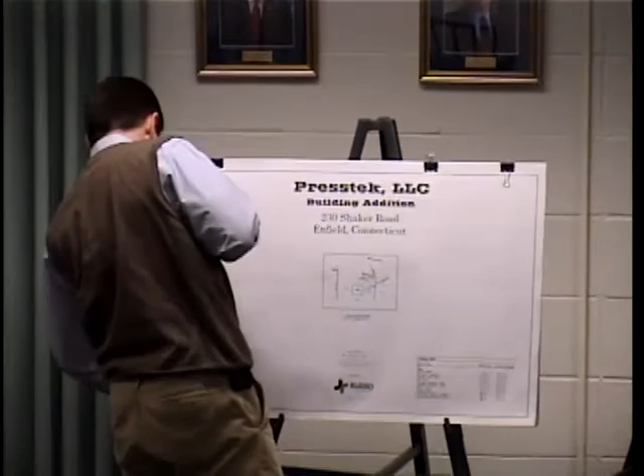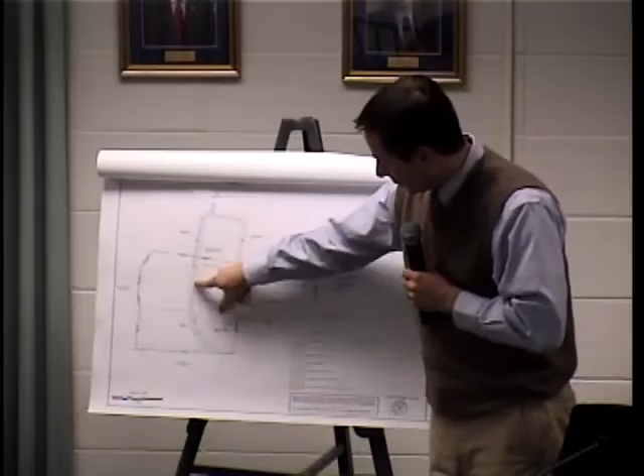As I mentioned, this is a 25-acre parcel. You see it's a rear parcel with a long driveway that is accessed off of Shaker Road. This is the building location on the lot, in the middle of the larger portion of the lot. Look primarily at sheet 3, and then we'll go into more details. This is the overall site plan, and I've highlighted with color here some of the key features I want to draw to your attention.

First of all, the existing building is shown here with the striped hatching, and the proposed addition is this gray shaded long portion, which is on the north side of the building. In this case, north is facing to the right rather than up.

The building is located in an existing lawn area between the access drive, which comes in off of Shaker Road and goes around the north side of the building to the main parking lot to the east. There's also a fire lane that accesses the west and south end of the building.

The blue line you see here is the actual wetland line delineated in the field by our soil scientist. The green line is the wetland line as shown on your town wetland map. As you can see, it goes right through the building.

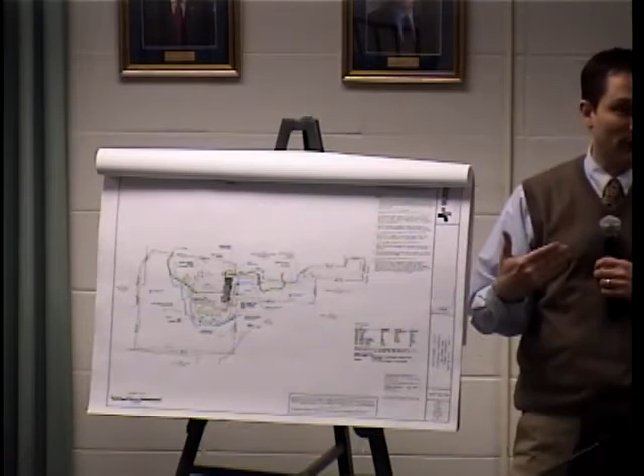There's less wetlands on the site than the wetlands map indicates, but there are wetlands, and so there are regulated activities associated with this application. Particularly, the wetlands in view are associated with a stormwater basin.

That stormwater basin is located on the east side of the driveway. As you come into the site off this driveway, on the left-hand side is a stormwater basin, and that stormwater basin is considered a wetland. So that blue line represents the wetlands in closest proximity to our proposed activities.

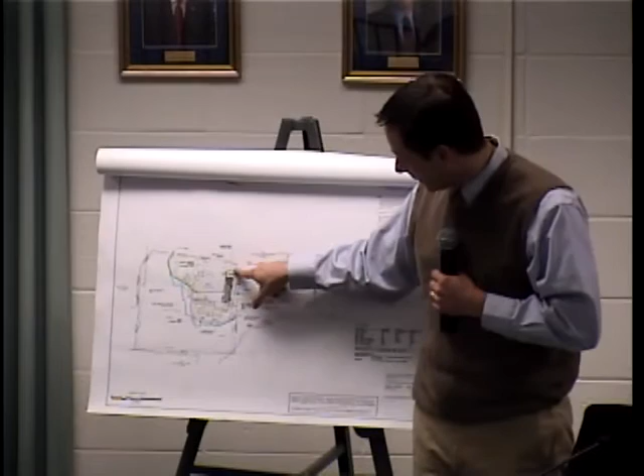The yellow line on the plan is your 100-foot regulated area. So everything within that yellow line falls within the jurisdiction of this review, which includes about half of the building, as well as the drainage improvements and utility work proposed on the north side of the addition.

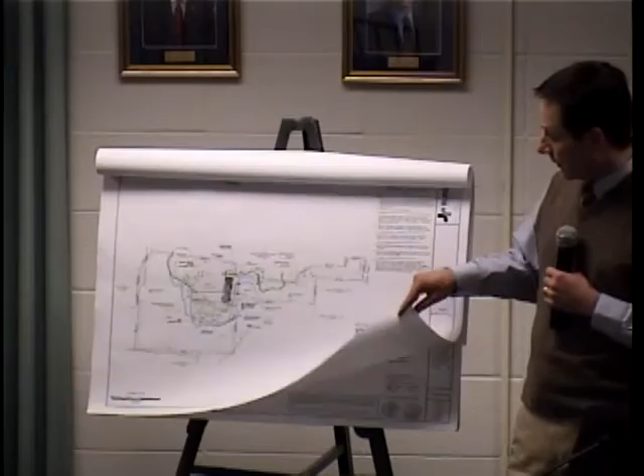So I'd like to move on to the more detailed plan. This is at 1 inch equals 20 feet and shows what is being proposed here. We have a building addition with a narrow connection to the existing building within the existing lawn area in front of the building.

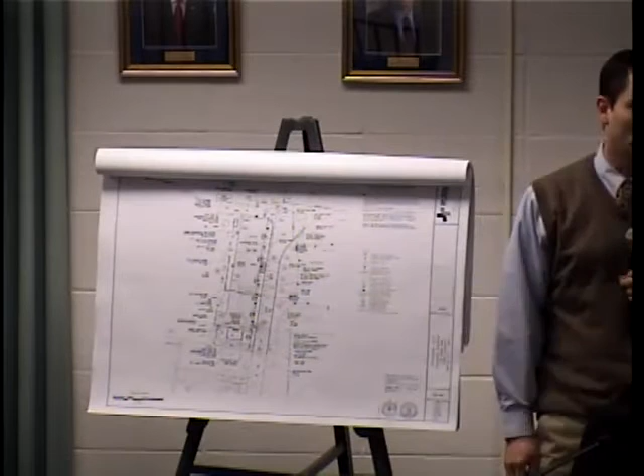Associated with this building are some utilities and mechanical equipment. One is on the east end of the building. This large concrete pad is what they call an RTO. It takes exhaust and burns it so it's clean before it leaves the building, involving a stack to discharge that at an appropriate height, and that stack and its emissions are regulated by the EPA.

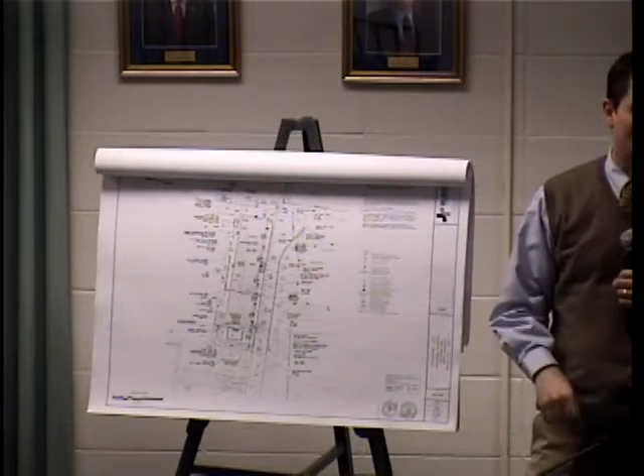But this is going to be a concrete pad, visible from the outside of the building, approximately 111 feet from the property line, which is about the same distance to the wetlands—a little over 100 feet away. So it's not actually in the regulated area, but not too far from it.

The other activities outside the building are on the back side. The plans you have show this concrete pad in the back, which is for a nitrogen tank—a vertical tank above grade that holds nitrogen for the processes done inside the building. We've added a couple other items: a generator right next to it, and possibly an underground tank for fire suppression.

Because we're not sure yet what the fire department and the water company will be able to provide in terms of volume for the sprinkler system, that underground tank is there as a contingency if it's needed to provide that extra volume for the fire system.

Excuse me, that's not on here? No, that's what I said. So the things we've added are the tank and the generator.

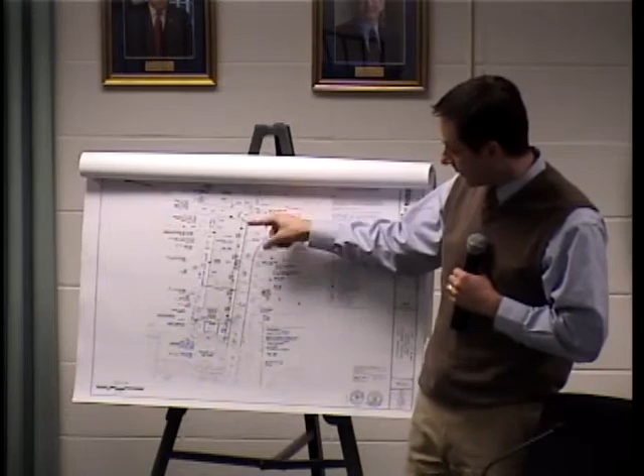This plan has just recently been submitted to planning and zoning, so we have an application coming up before them. One other change: you'll notice on your plans there's a corner of the building, the northwest corner, where there was a notch in it. The reason for that notch had to do with some building code hurdles the applicant had to decide how to address.

That was one way to address it, by maintaining a certain distance from the property line at this little corner. Well, they found another solution that didn't require that unorthodox jog in the building. They were able to eliminate the jog by increasing the distance between the existing building and the addition by another 4.5 feet—it was 16 feet, now it's 20 and a half feet, a 4.5 foot change.

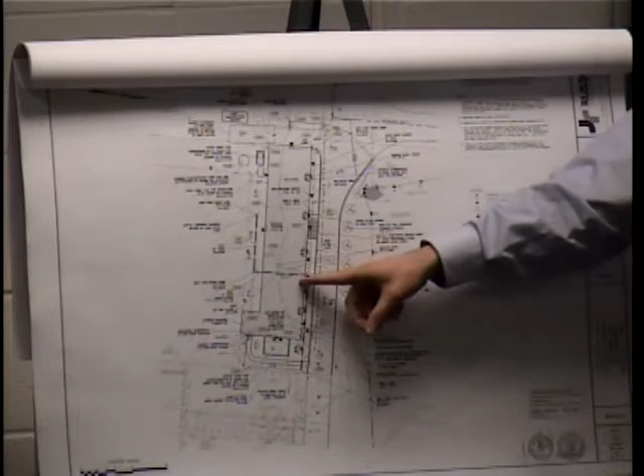What moving that building has done is put our storm drainage, which we're putting in to pick up the roof leaders and runoff from the roof and some of the lawn areas, into conflict with an existing gas main in that area. So we're relocating the gas main.

Also, because of the grading of the building and the need for an overhead door on the west end of the building, we've regraded the pavement around here. So all of this pavement, shown by the dot shading, up to this limit and around this side of the drive, is going to be replaced—that's disturbance within your regulated area again. But we're not changing the driveway location.

We're not moving the driveway any closer to the wetlands. We're leaving it right where it is. We're just raising it up a little bit higher so that it works with the doors of the building. Originally, we were going to have steps coming down from there or not have direct access, but that was...

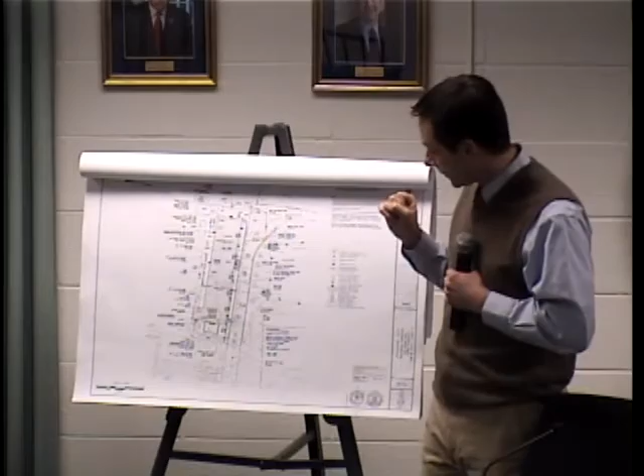This next page is our erosion control plan, which depicts the erosion control measures for this site. Essentially, because this is a grass area, they're going to have to strip the topsoil from this area. We're going to stockpile it up here with silt fence around it to protect it, and then any excess will be removed because they're not going to need as much when they are done.

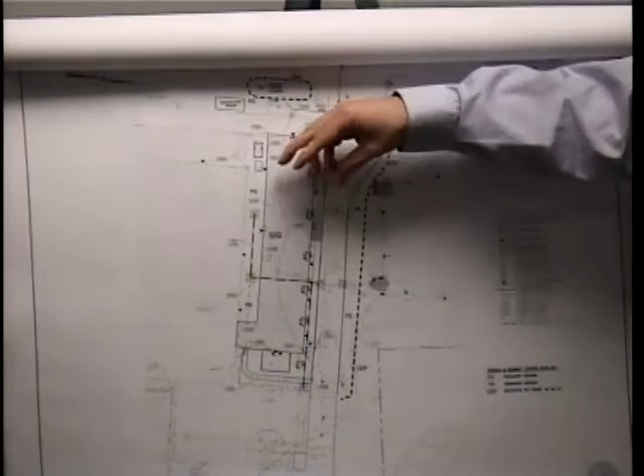And then all of the catch basins in the area - the other key area where there's potential for impacting the wetlands during construction, obviously from sediment, dirty water getting into the wetland system and into the storm drainage. So silt sacks will be installed in each of those catch basins, and they've been noted on the plan that they'll be protected with the silt sacks, which have to be cleaned and maintained during the construction process.

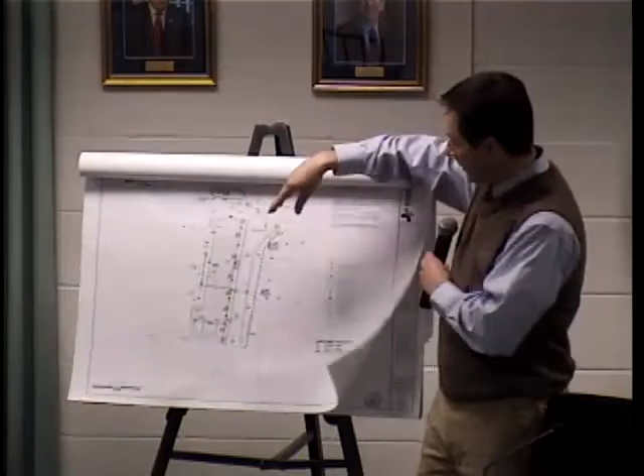In addition, I'll just mention briefly that the plan you had did not show a silt fence along this side of the road because we weren't touching the road initially, but now that we are, we need a silt fence there, and so we do show the silt fence there.

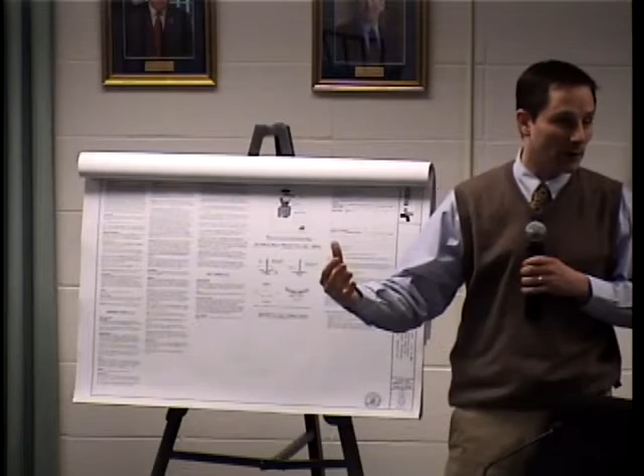And then, just briefly, in addition to the erosion control plan, we have our erosion control notes and details that include a construction narrative and sequence, which is here below the checklist, as well as a post-construction maintenance schedule, which provides direction to the property owner to maintain the storm drainage system so that it continues to function properly, so that we don't have long-term impacts down the road to these wetlands.

So that's the summary. I don't know if we need to go into the details of the building itself or anything related to that. I did bring those plans if you'd like to discuss them.

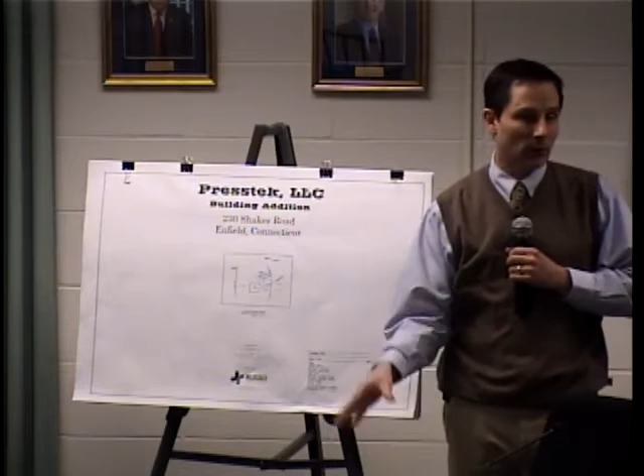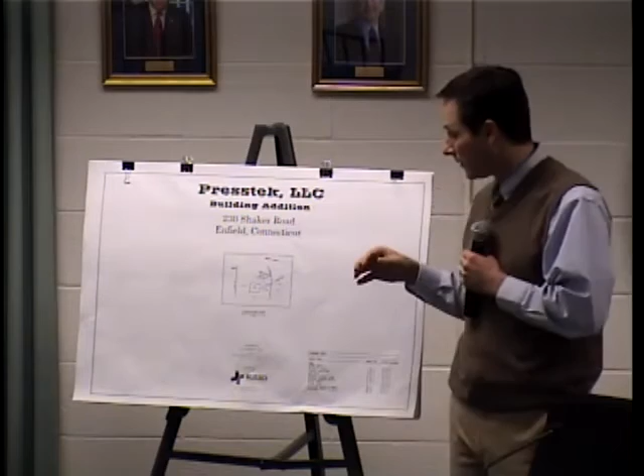In our ART with staff, they had suggested that we submit an environmental report regarding the property, which was submitted with the application. It's something that was required as part of the transfer of this property. Presstek bought this property from Anacoil. You may recall Anacoil was the previous name. I think there's still the sign out front that says Anacoil, right?

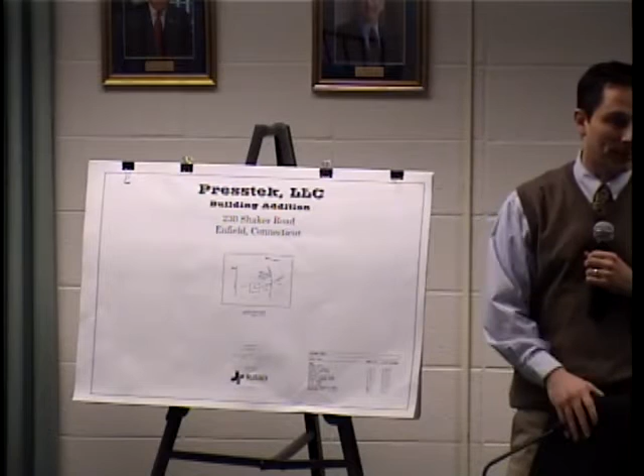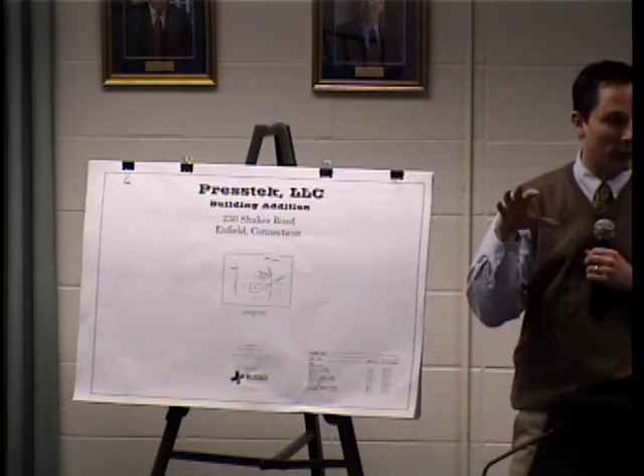So the report was provided as a courtesy to demonstrate that there are no existing environmental issues associated with this property. This is an industrial use and an industrial activity, and the representatives from Presstek can give you a lot more detailed explanation about what they exactly do. But essentially, they're coating plating for printing plates, lithograph printing plates, and that process involves chemicals and materials that are hazardous and are contained within the building.

So one thing that's important to note, and which we did in our narrative, is explain that all of these hazardous materials occur within the confines of the building. And if you go back to the overall site plan, for example, we were asked to note specifically where those hazardous materials are stored in the existing building.

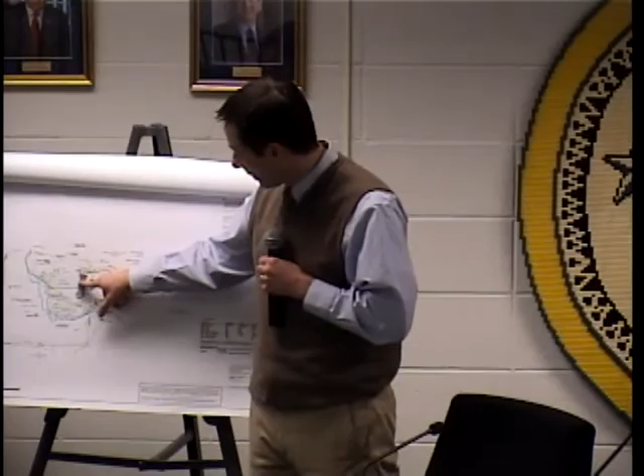So that's designated here on the plan. It's in the back, that would be the southwest corner of the building. That's an enclosed structure, so it's not open to the elements. It's a contained area. Then the new addition is broken up into two parts, and the chemicals are located in this portion here, which is the crisscross hatching portion of this building.

So we just wanted you to understand and see where those activities were taking place, but assure you that they're intended to remain completely inside the building. There's no floor drains in the building where if it leaked, it could get out and get into the wetlands. And so we don't see this as having any impact on the wetlands.

But maybe Scott, you would like to talk about how you identified these wetlands and your findings.

We on? Not sure if I'm on. Am I on? Okay. Good evening. For the record, I'm Scott Stevens.

I'm a registered professional soil scientist with Soil Science and Environmental Services Incorporated out of Rocky Hill, Connecticut. I've been with the firm since 1987. Like all of you, I also volunteer my time, and I'm a wetlands commissioner, on the Wetlands Commission with the town of Rocky Hill for the last 5 years or so.

On January 25th of this year, 2017, I inspected the site at 230 Shaker Road in Enfield. We delineated the wetlands and the water courses on the property, dug numerous holes all throughout the whole site to basically classify the soils and delineate the wetlands on the property. There's basically 4 different wetland areas that I delineated with 76 flags.

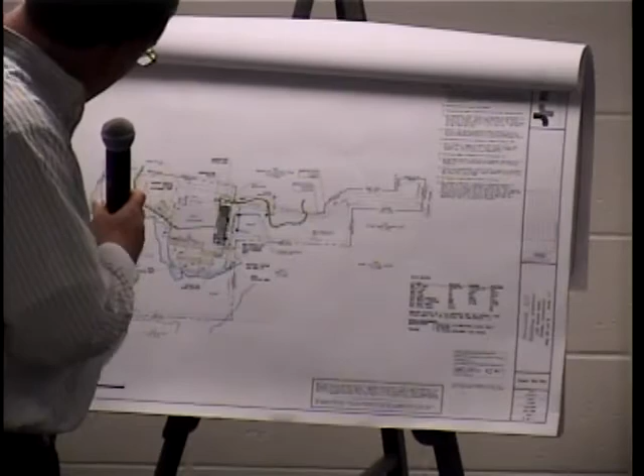Maybe you could go over to the map and just explain where that pond and the water course are. That might be of interest to them. I believe they're pretty remote from the area that we're working in. Again, the property would go this way, that's to the north. So the ponded area is way down here within the middle of the wetland.

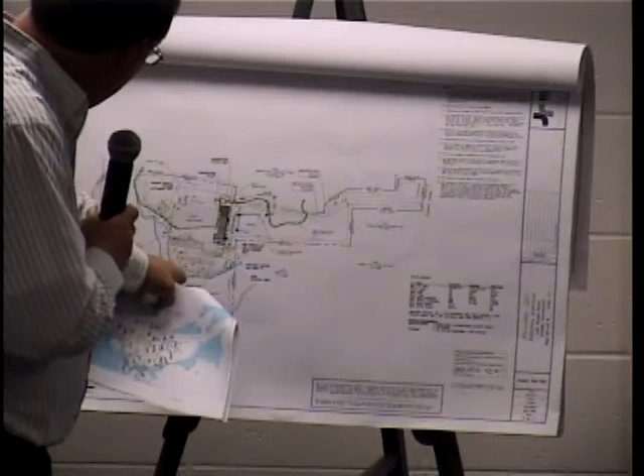And then the water course, you can't really quite see that railroad track, but oh, here it is. So where that railroad track is, the perennial water course kind of comes down through this way, goes into a culvert pipe, and then it keeps flowing that way as far as I could tell. And there's the detention basin there with the wetlands that are closest to it.

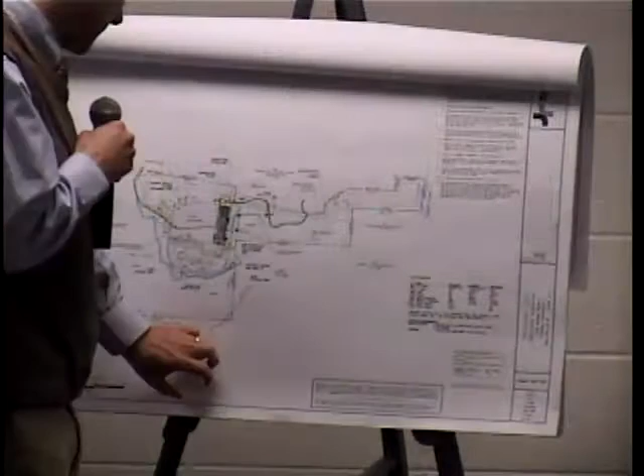Where does that detention basin discharge to? So there's an outlet pipe in this corner of the basin, and we're actually not changing any of the pipes going into or out of this basin. All of our work is occurring in the existing developed areas. But there's a pipe coming in here, there's a pipe coming in here, there's a pipe coming in here, and then right next to that one here is one going out that appears to go in this direction, and it must discharge somewhere down here.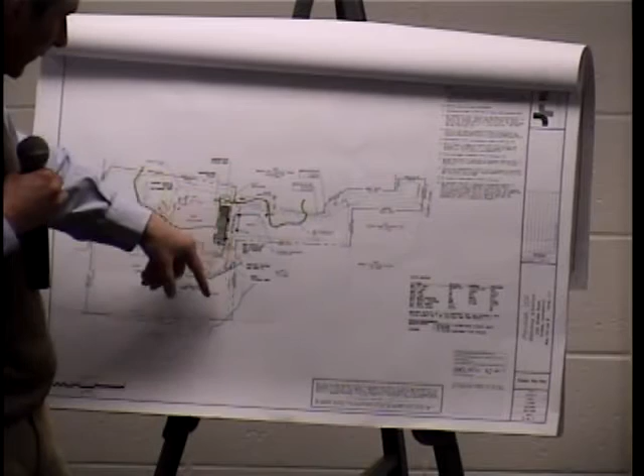So you didn't locate the actual outfall? No, the actual outfall was not readily identifiable. But it does go down to that. Yeah, it heads in the eastern direction. That way.

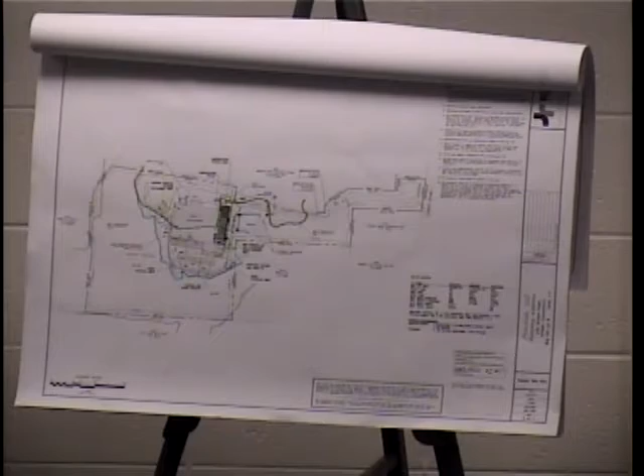One thing we did note is, I think Carrie Ann noted it this afternoon, the ECAF wasn't in our packet. The environmental condition assessment form you're speaking of? Yeah. We did submit that with our application, so I'm not sure why it wasn't included in your packets. It is in the file. You would like to see it? Yes.

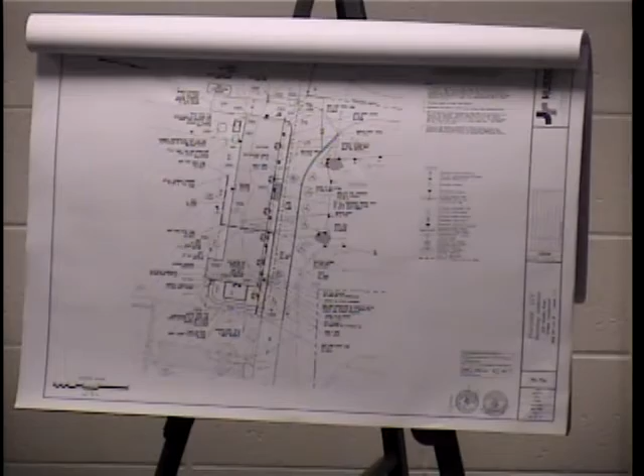This is the nitrogen tank pad, and to the west, to the east is the generator, and to the south is the fire suppression.

The only underground is water, clean water, yeah.

So Dan, I'm sure we're going to get new plans, updated. We would like to, if you could, approve with condition, and then we will submit the final plans that include all that I've presented tonight. Correct, and any other conditions that you place on it.

Yep, sure. And then make sure he signs it. It says here that Scott didn't sign the plan, so.

I believe so, yeah, there's a typo in the letter. Because they're signed, there's a signature right here on the copy. It's just the typo in the letter. Did it have that on another application? So it possibly is on the site plan, sorry, Steve. Oh, okay.

Now, with the change of the wetlands location, refresh my memory, I missed the last meeting. You guys haven't been before us to actually request that, correct? So is that part of this application, to move the wetlands, or is it just that you're looking for the permit to be within the regulated wetlands?

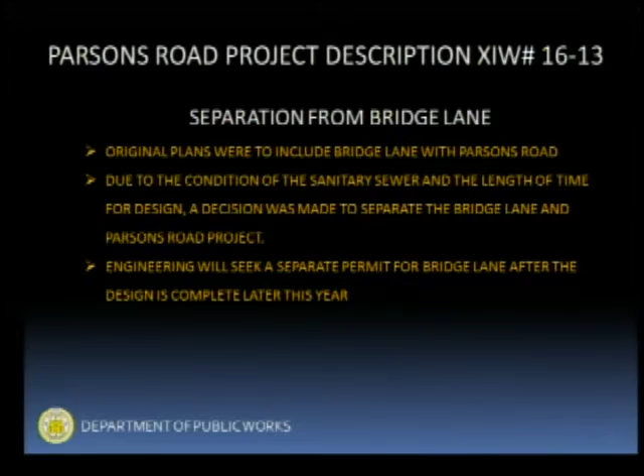It's a very complicated project. We have a very large culvert over there towards the westerly side, and we have a lot of things that we're doing out there, so we're going to be back to do that. So in an effort to move forward, Parsons Road has been split, and we're going to move forward.

So this project consists of about 1.2 miles of complete roadway reconstruction with some very minor vertical and horizontal alignments to it. There's going to be new curbing. There's improved and new storm drainage systems, which the big take-home point is going to be a very large, significant improvement to the water quality.

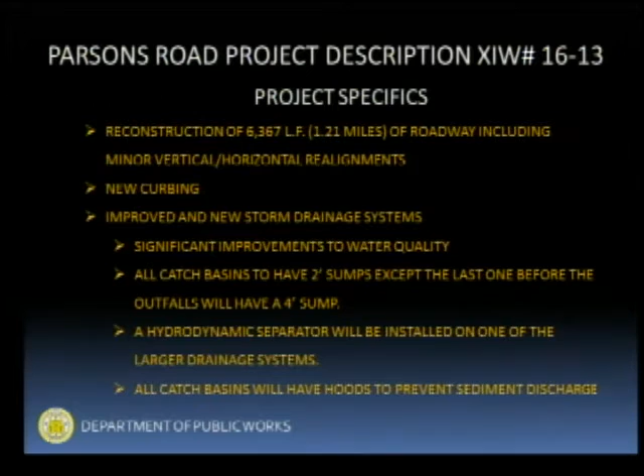All the catch basins are going to have 2-foot sumps now, except for the last one before the outfalls, which are going to have a 4-foot sump to help trap sediment. A hydrodynamic separator is going to be installed on one of the larger drainage systems, which is on the western or the southwesterly portion next to the train tracks on the southerly side, before that goes out to the large 36-inch outfall. All catch basins are going to have hoods or traps, however you want to call it, to prevent sediment discharge.

We are installing 9 new catch basins, and we're going to replace the rest of the 16 of them in their entirety. We're not just going to rebuild them, we're going to replace them with newer structures. We're going to add 3 drain manholes as well.

The 4 outfalls are going to discharge to riprap splash pads, which again helps reduce erosion, slows the stormwater that can come off it, and also helps to trap some sediment before it's discharged to the river. We're going to do our standard turf establishment in all the grading areas, and again, the biggest thing here is the water quality improvement.

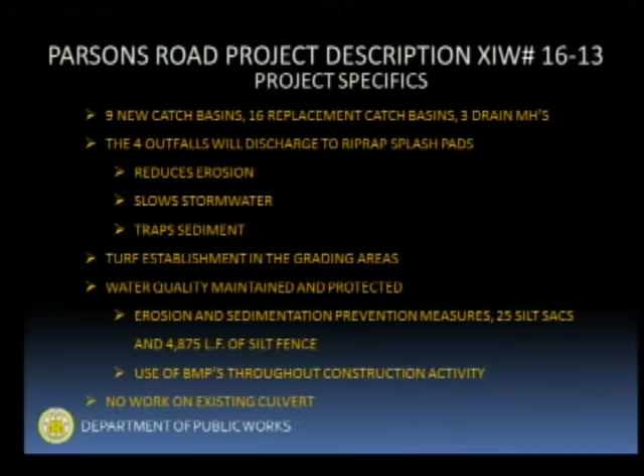We're going to install 25 silt sacs during construction, and we're planning on using 4,875 linear feet of silt fence along the roadways. We're also going to use our best management practices throughout our construction activity, and one of the biggest things is there's no work on that existing culvert, that 10-foot structure next to the boat ramp on the southerly side. We're not going to do anything there except for replace the catch basin that's in poor shape there.

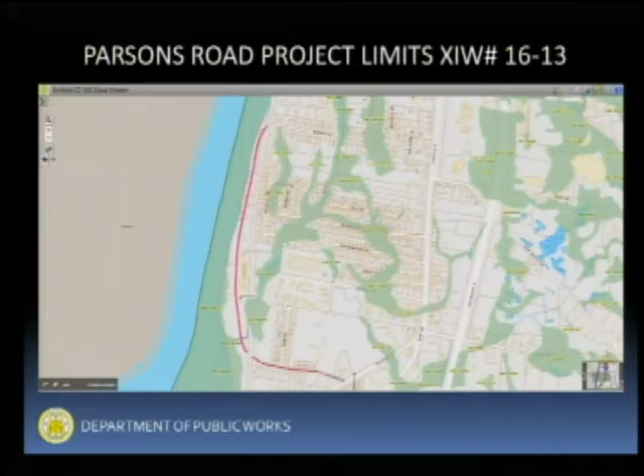For those who don't know where Parsons Road or Bridge Lane is, this is Route 5, Enfield Street, which splits into King Street here. This is Old King. Our project starts on the southerly part, Parsons Road, and goes westerly to the first train tracks. The boat launch is in this area, and that large culvert we're not touching is right here. The dog pound and treatment plant are in this vicinity, and we continue up to the train tracks. We've had negotiations with the railroad and aren't doing anything in their right of way, so we're saw cutting up to the property lines due to future expansion, since they don't want us touching anything near there. We're marrying into that as our logical cutoff point.

The road is in tough shape, for those who've traveled on Parsons Road lately. This is from Old King Street looking westerly.

There's a large farm over here on the right side. We're going to put some silt fence in because we're in a fill situation here. The road has curbing in some spots, not through here, but we'll be curbing up through here. We're going to leave this open for the farmer and install a Federal Highway Administration safety edge, which is a thickened edge to prevent edge cracking from farm vehicles. We don't want to limit the farm to one entrance area, so if they want to come in with a machine and turn around, we want to let them do that without hindering their operation. We're trying that here to avoid edge cracking and preserve the road for later.

This is going down the hill, starting to come down towards the train tracks. There's curbing, and the road is just in tough shape. Coming down more, this is a very steep incline towards the railroad tracks—you can see them off in the distance.

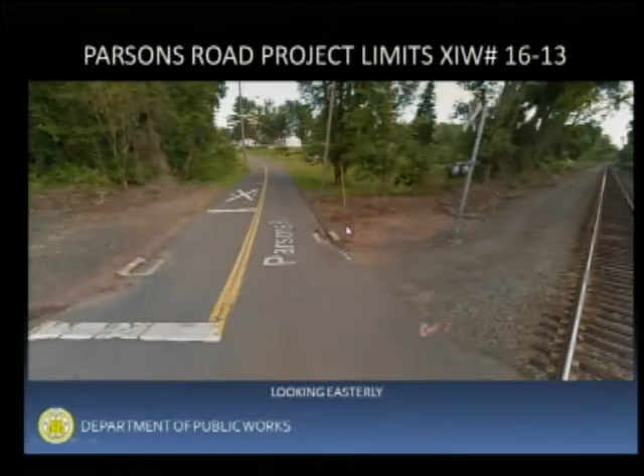Coming down this hill, we're installing a hydrodynamic separator as part of this system before it discharges into this catch basin, which is part of the 36-inch system that goes directly out to the river. We want to catch this water coming down the hill, put it into the separator, and clean it up before it goes out.

Where's the cutoff there? It's not a nice easy straight line—it's a series of odd angles and jagged, the goofiest thing I've seen. But we're going to cut it right through here, and we'll make it work.

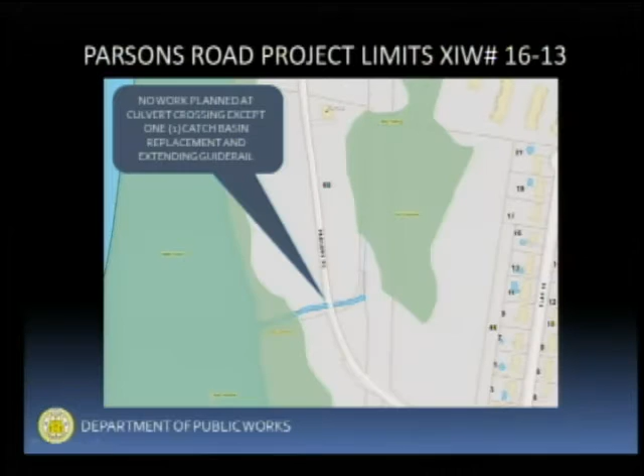Again, this is the boat ramp through here. We're just cutting it off right through there, and this is that culvert we're not going to improve—when I show you the pictures you'll probably see why. It's a monumental bridge and we don't want to touch it. The road isn't good through here, but these abutments are in really good shape.

We are going to be replacing this catch basin—this is what it looks like now. This is from 1985 construction, and it still looks great, minus some graffiti, which looks like someone made a low tide mark. You can see right through there someone's actually making graffiti marks, but it's in wonderful shape. There's no reason to touch it.

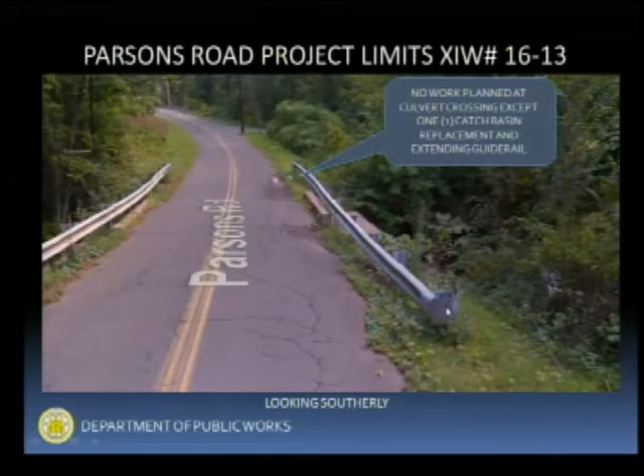It is a little narrow on top, about 18.3 feet road width. We call it traffic calming, so we're going to go with that and just extend the guardrails out so no one's hitting this directly. We're going to make them correct through there, but again, we're not touching this—we're not making that improvement. That's a project in itself, so we decided to leave this as is and just do the roadway and move on.

The dog pound and water pollution control area has a different feel—there's no curbing, water drains off to the side. It's a little different feel from the southerly portion.

Houses, driveways, everything's right up tight to the road. It proposes some challenges for us with the roadway. Some of the right-of-ways are really snug to the road, and we're right there. And I thought the railroad had a goofy right-of-way — there's some of these through here. When you look at them, some are actually touching the road that's there now and kind of jog in, but we're getting through it.

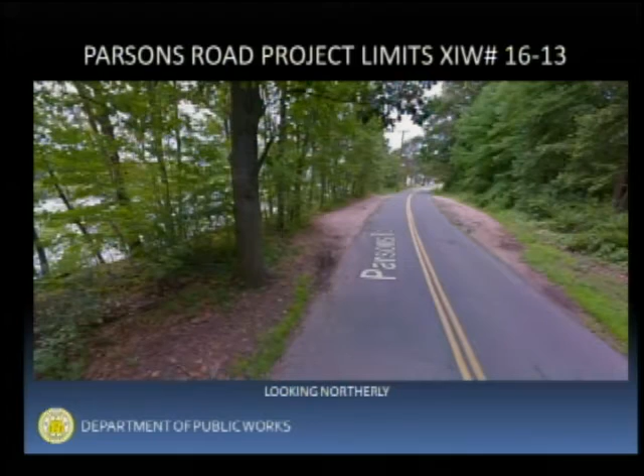In the distance here is the other northerly end of the train tracks, and again, different feel. These are turnoffs, very popular fishing spots, and we're going to make sure there's thickened edges through here. We're going to recreate or make some aprons, some thicker pavement through there, so we're not getting that washout.

From a construction plan point of view, this is back to Old King Street and Parsons Road. This is the farm we're talking about. We're talking our typical erosion control systems next to the farm. We are filling in a little bit, so we're going to put some erosion control there — we don't want our road stuff washing into the farm area.

All the catch basins here, 1, 2, 3 — all these are going to be replaced. We're not resetting them, we're not rebuilding them, we're not just taking the first three feet off. We're replacing them and putting in sumps for water quality.

Coming out, as you can see on the plans we submitted, all the stuff is again for water quality. Here's that hydrodynamic separator again — it's going to be well within our work, well within our right-of-way. Cleaning up, once it goes in there, on this section you can see it dumps into the 36-inch CMP, which goes straight out. So all the water coming down that hill is going to be treated, dumped in, and we'll clean it up as we go.

All these are the guardrail. This is that large culvert system you saw that we're not touching. We're extending the guardrail and installing silt fence all along the edges throughout here — almost 4,900 feet of it. The whole point is to clean up the water and make sure nothing gets back in there, because we're so close to the river. Even though we're not really in any impact areas per se, we just want to make sure we're not doing anything bad to the river.

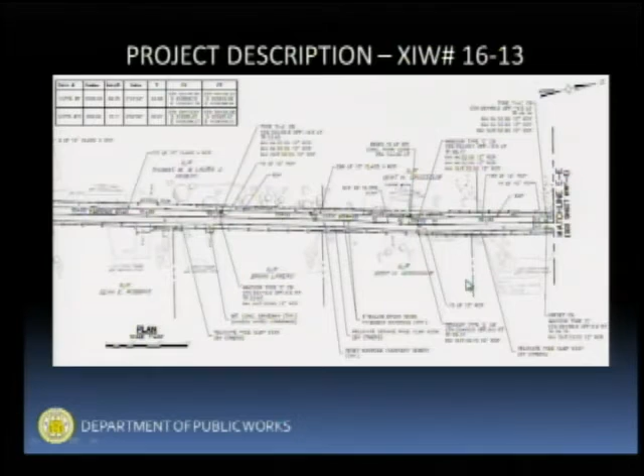The outfalls here are going to be protected — we're going to make sure there's riprap on them. And we're coming around doing a whole bunch more of this. The focus has been water quality because of how bad the catch basins are and the condition they're all in now. So that's our primary goal.

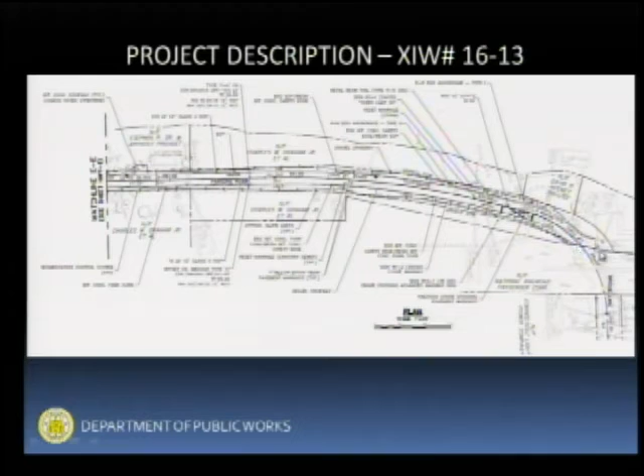Coming around through the other train track — I told you about some very funny right-of-ways. We're going to be working up there and not doing any work in that right-of-way. Those turnarounds I talked about and showed you in the picture are in through here. Again, thickened edges or guardrail, whatever we can do to protect those edges.

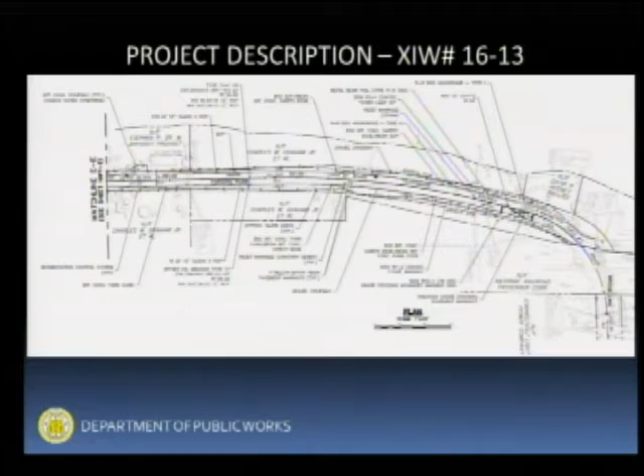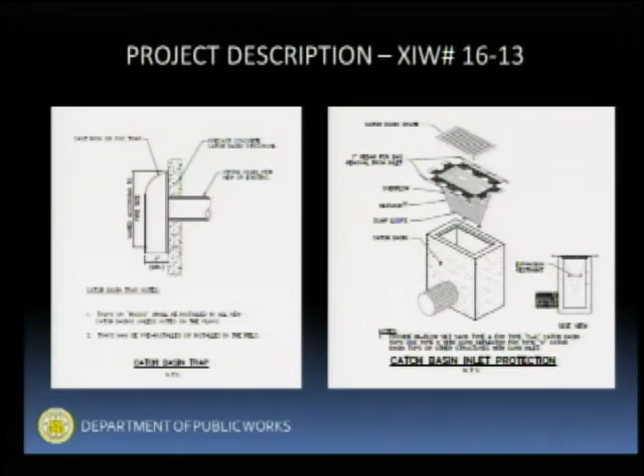The catch basin traps — some people call them details, hoods, or traps, all different language — basically that's what we're going to be placing in every single catch basin on the outbound sides. Our catch basin inlet protections are standard silt sacks that we use during construction before that catch basin gets replaced, to make sure no other debris is going in.

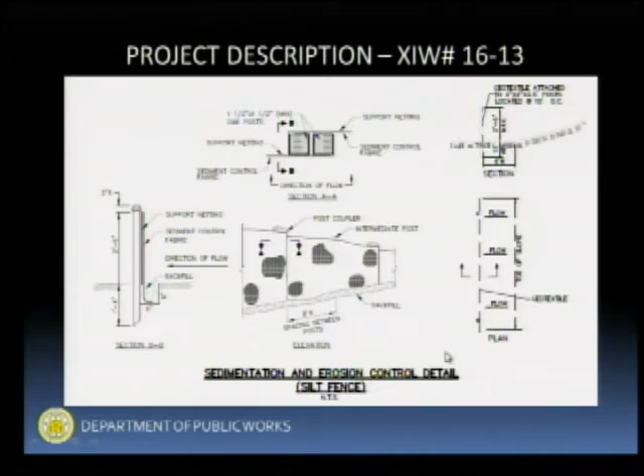Our standard storm drain marker notes go on all of our catch basins — we glue these on after the fact on every single one of our projects. And here's the standard detail of the silt fence we plan on installing, about 4,900 feet of it.

So some of the big take-home points: Parsons Road is in poor condition at best. The storm drain improvements we're doing are trying to upgrade the entire system, not just isolated spots — the entire system minus that large culvert. All those improvements are going to really affect water quality. We're going to use our best management practices throughout construction activity, well documented in our specs, including what the contractor can't do. We're really focusing on that.

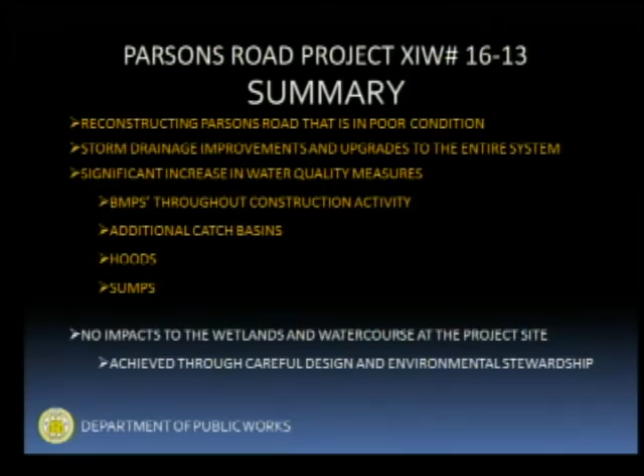The 9 additional catch basins, the hoods or traps however you want to look at it, and the sumps on all the catch basins now — since not all of them have them — will result in basically no impacts to the wetlands and watercourse at our project site. We achieved that through careful design with ourselves and Weston and Sampson, with the ultimate goal of environmental stewardship, being so close to the river and to WPC with the operations they have. We've tried to make sure it all works together.

So that was a brief run-through of Parsons Road. If there are any questions or comments, we are available.

It was an excellent presentation. Thank you.

Does anybody have any questions, comments? Thoughts? Nope. Did I have any motions? All right, I'll make a motion to approve XIW number 1613, Parsons Road reconstruction, with the standard conditions.

Okay, do I have a second? Second. Okay, can I roll call please? Sure. Donna Corbin-Sabinski, yes. Kevin Zorda, yes. Carrie Ann Howe, yes. And Jane Smith, yes. Motion passes, 4 in favor. Thank you very much, gentlemen.

Okay, next on the agenda is new business, which I see we have none. Number 12 is review of the bylaws. We revised these bylaws a few months back, so this is a revised copy. We have to read them again, look them over again, and we'll vote on them at the next meeting.